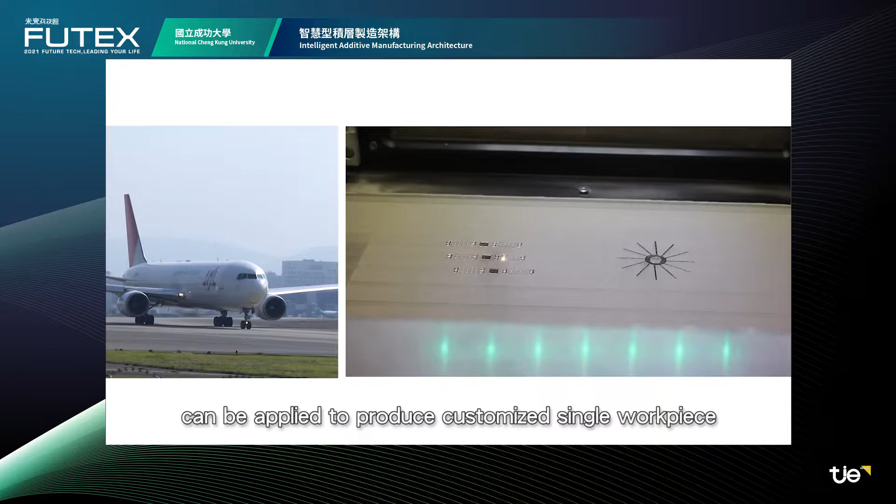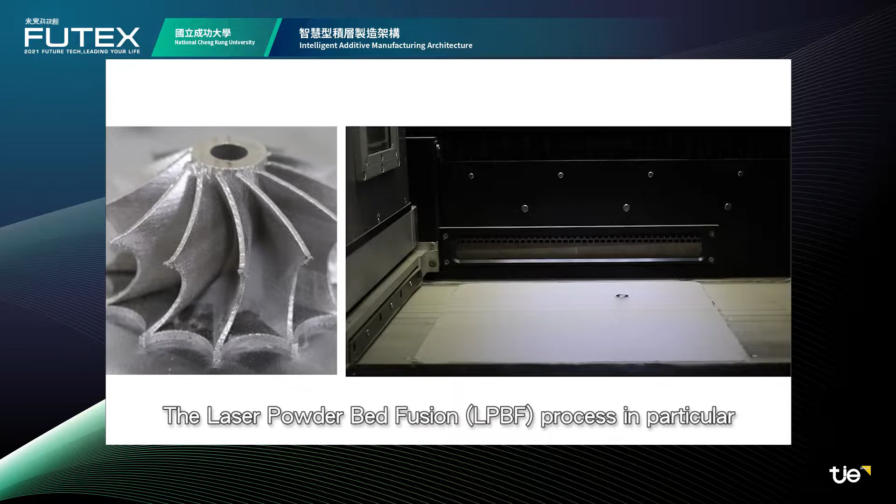Additive manufacturing, AM, can be applied to produce customized single workpieces in the aerospace industry, medical devices, and parts of high geometrical complexity which cannot be easily produced by conventional means of manufacturing. The laser powder bed fusion, LPBF, process in particular can manufacture complex, accurate, and fully dense objects.

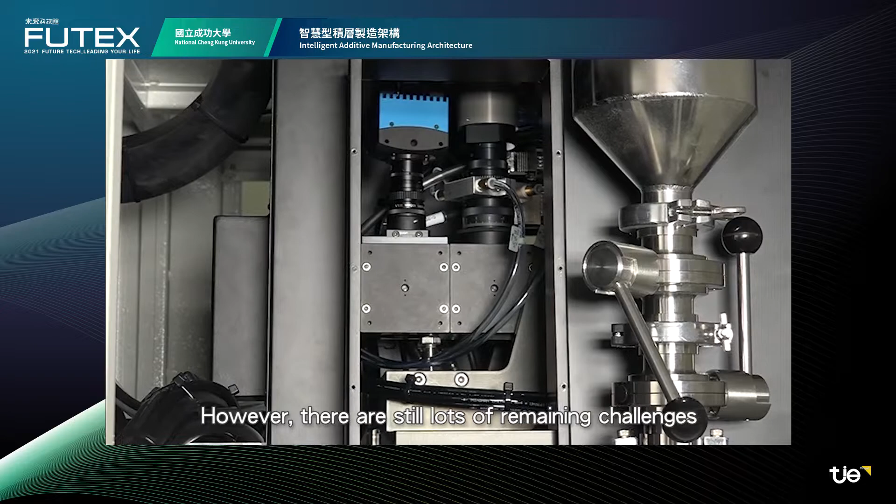However, there are still lots of remaining challenges of LPBF production quality. For example, how to efficiently find the optimal process parameters and how to effectively and timely evaluate the quality.

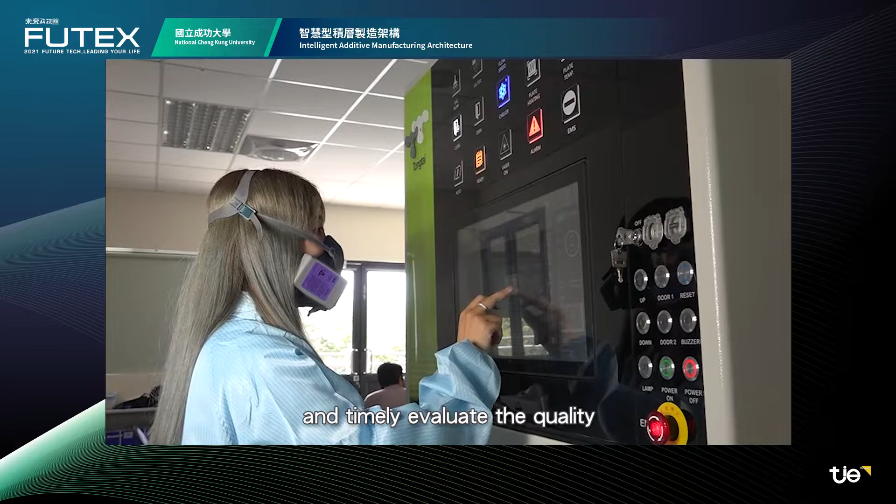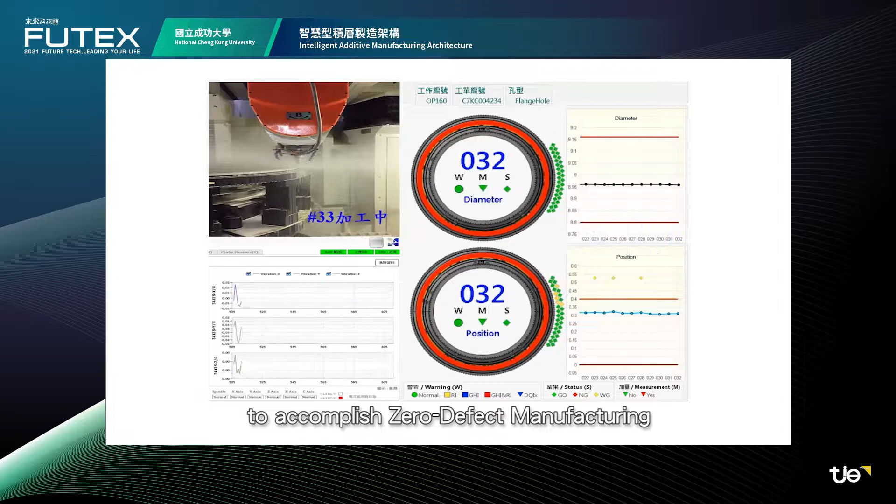The Intelligent Manufacturing Research Center, IMRC, of NCKU is dedicated to assist various manufacturing industries to accomplish zero-defect manufacturing. In other words, to achieve the goal of nearly zero defects of all products.

Hence, we launched our latest product on the additive manufacturing industry, Intelligent Additive Manufacturing Architecture, which includes ISM, AVM, AM Simulator, and Intelligent Compensator.

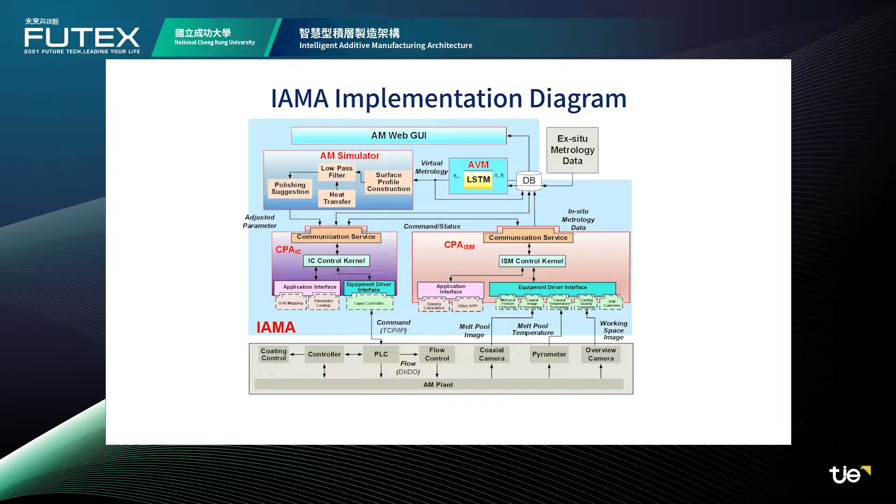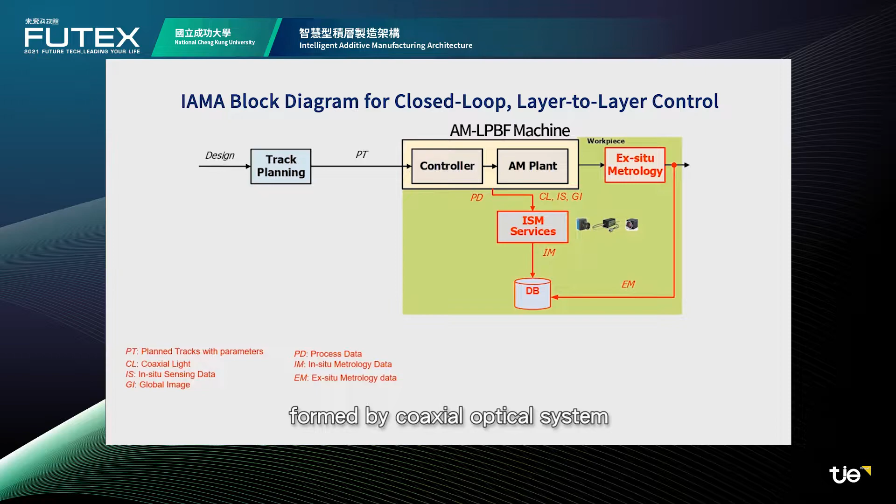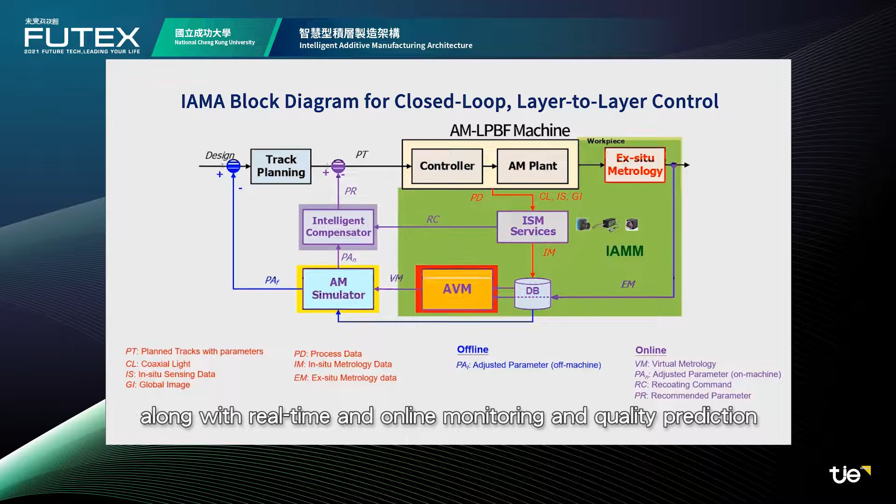IAMA offers a closed-loop, layer-to-layer control of the LPBF process through the in-situ metrology services formed by a coaxial optical system equipped with pyrometer and high-speed camera, the application of automatic virtual metrology, AVM, and the simulation performed by AM Simulator along with Intelligent Compensator. The IAMA can realize both offline simulations along with real-time online monitoring and quality prediction.

The two major functions of IAMA are in-time powder recoating and laser polishing to reduce the quality variation of each layer, so as to achieve the goal of nearly zero defect of the final product.

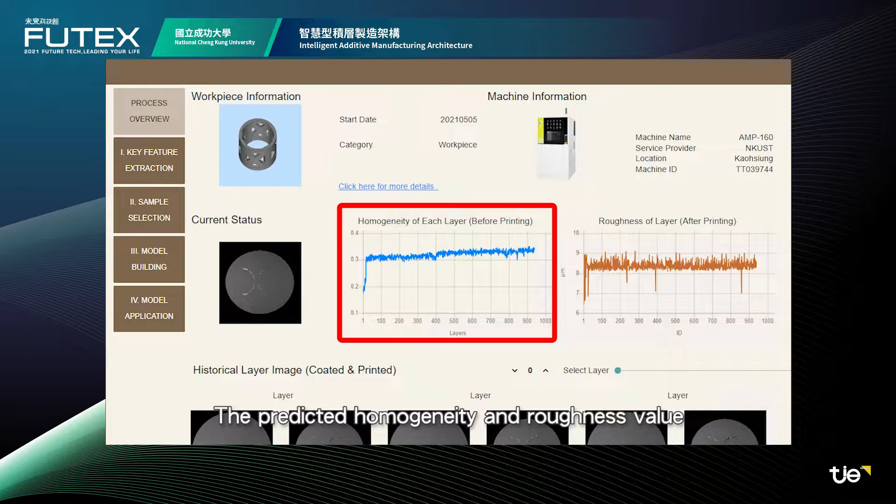The process status can be accessed remotely by Web GUI. The predicted homogeneity and roughness value and the melt pool images are displayed here in a clear layout.

The demonstration shows how IAMA works on Tongtai, our industry partner's AMP160. The LPBF process starts from powder coating.

In most cases, the powder should be homogeneously coated on the build plate. After coating, IAMA will then calculate the homogeneity of each layer and decide if recoating is required in 3 seconds, to assure the quality of each layer before proceeding to laser printing.

In the laser printing stage, IAMA will monitor the status of the melt pool and homogeneity to calculate the surface roughness after printing, and make a decision within 3 seconds on whether extra laser polishing is necessary.

The parameters such as laser power and laser speed are suggested by AM Simulator to compensate for the insufficient parts done by the first laser printing.

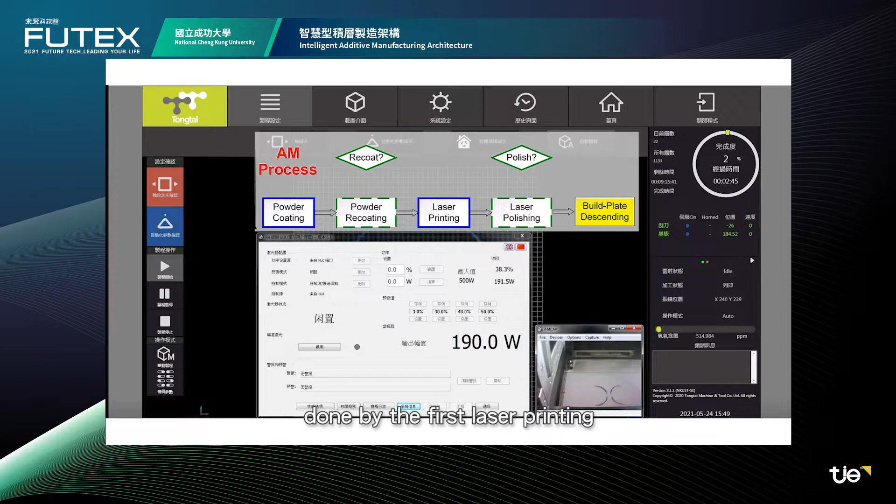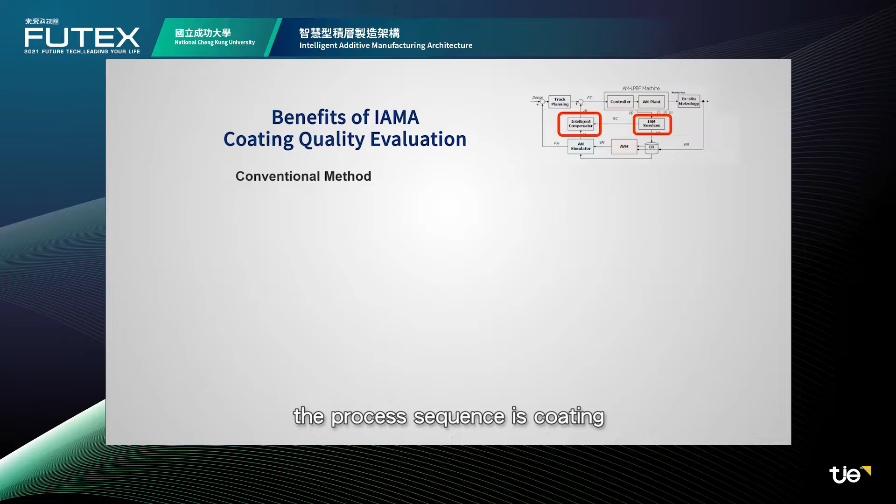If the powder was not homogeneously coated on the build plate, the recoating process will be initiated to stabilize the quality of this layer. In the conventional method, the process sequence is coating and then laser printing right away, without assessment in between.

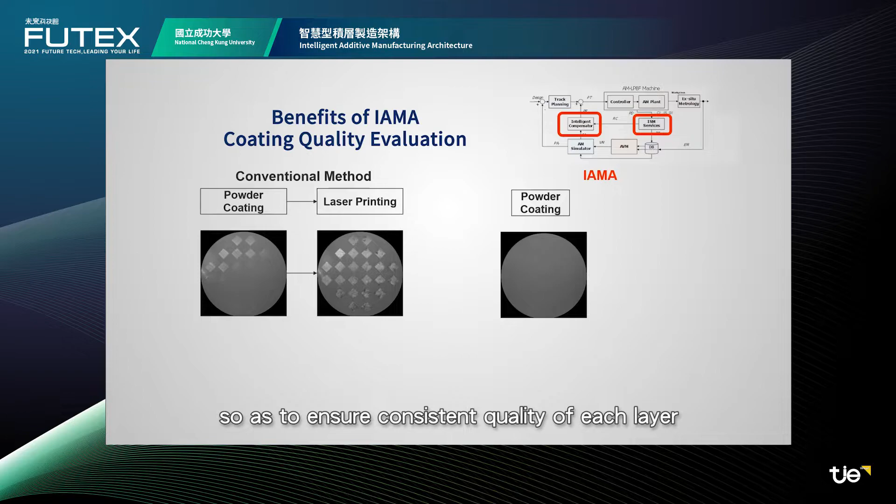With IAMA, we can calculate the homogeneity of each layer in time before laser printing, so as to ensure consistent quality of each layer.

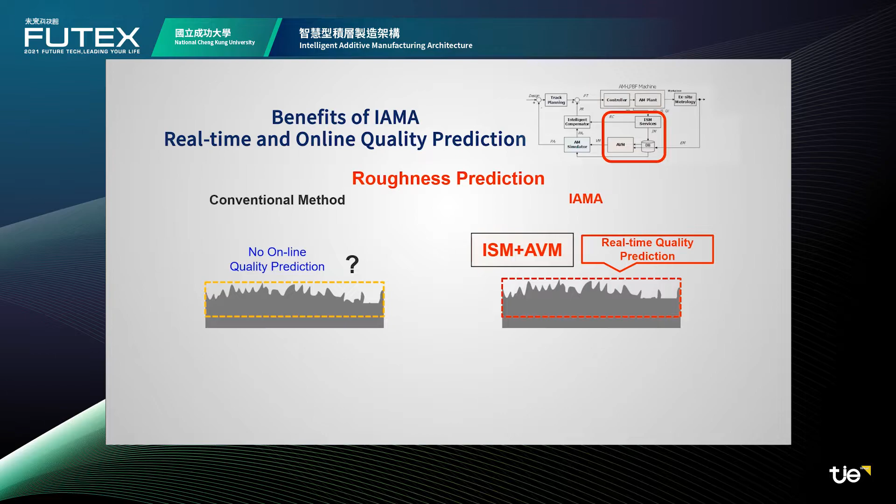Then the ISM services and AVM work together to predict the surface roughness of each layer, and then send commands to the controller to in-time compensate, which effectively controls the surface roughness.

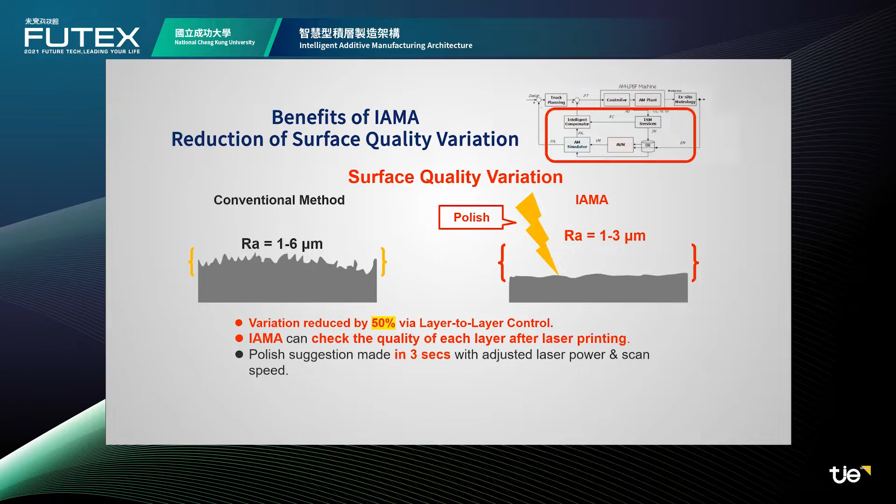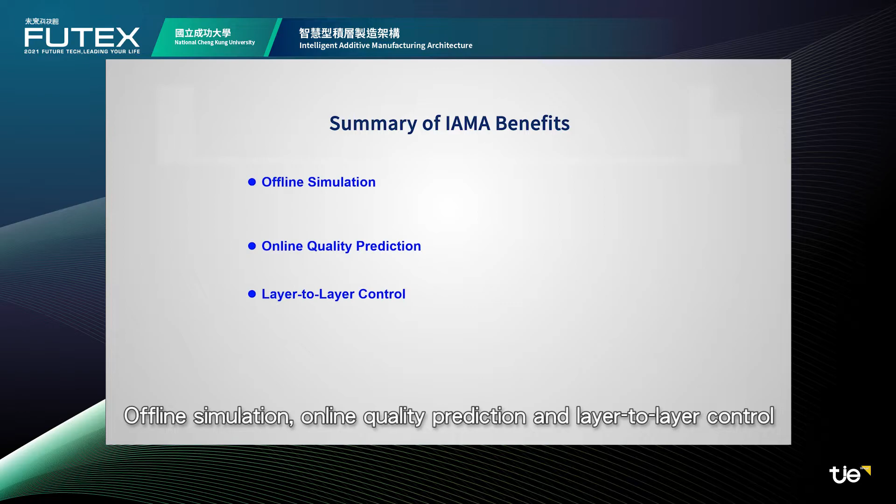The three benefits of IAMA are offline simulation, online quality prediction, and layer-to-layer control. Offline simulation significantly improves the efficiency for finding viable parameters by 6.4 times by shortening the initial trial period.

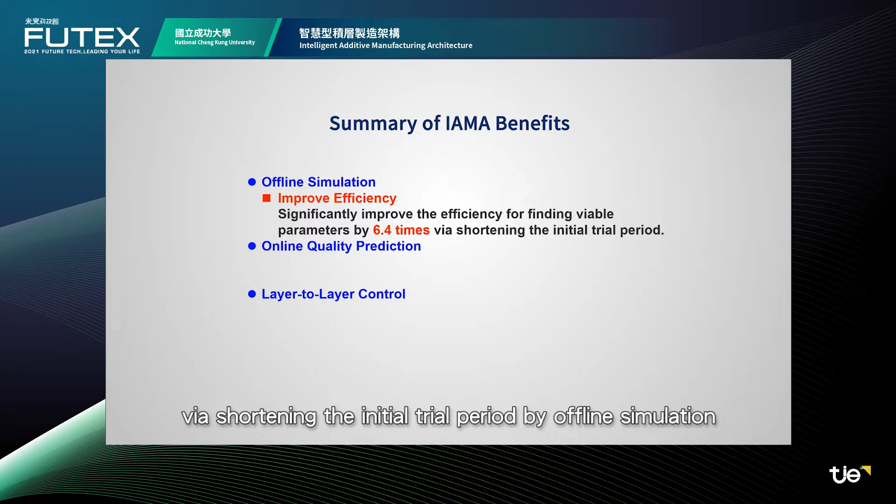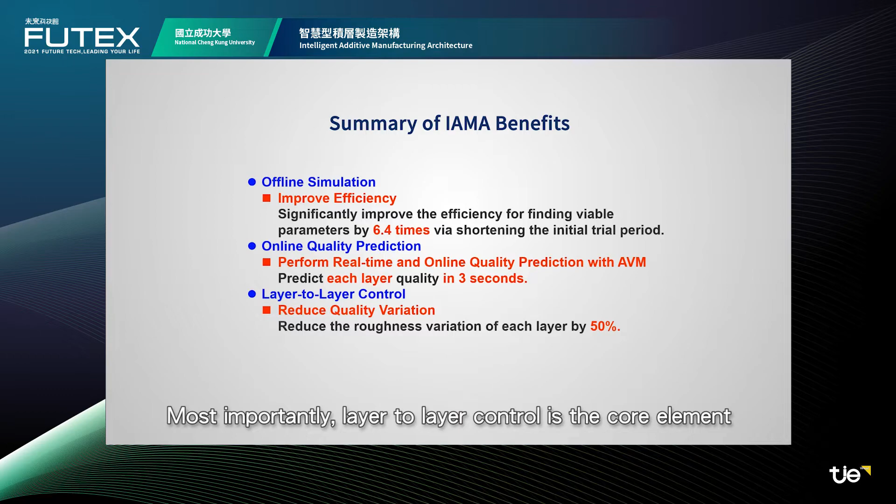Moreover, online quality prediction can predict the quality of each layer in 3 seconds with AVM. Most importantly, layer-to-layer control is the core element to reduce the quality variation of each layer by 50%, which ensures the stability of production.

All the innovative technologies integrated together accomplish IAMA, and realize the goal of nearly zero defects of Industry 4.1.

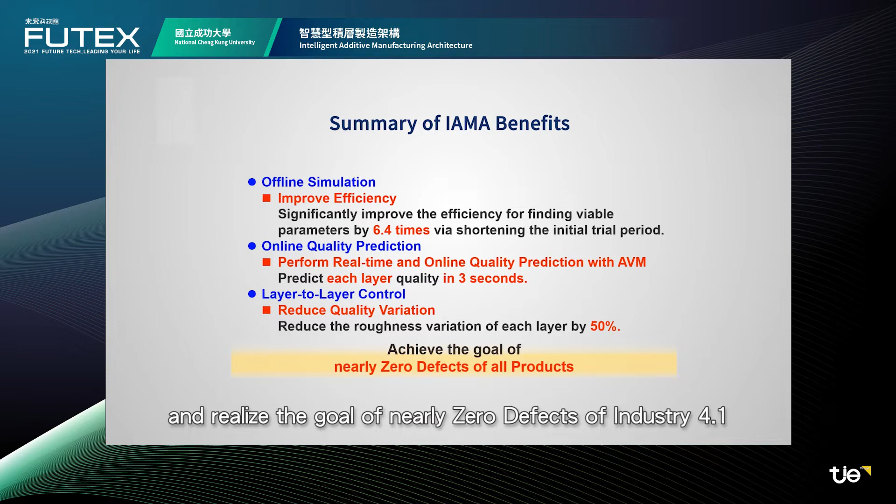With the implementation of IAMA, we can ensure the final product is of high quality. It is a definite game changer for the AM industry.